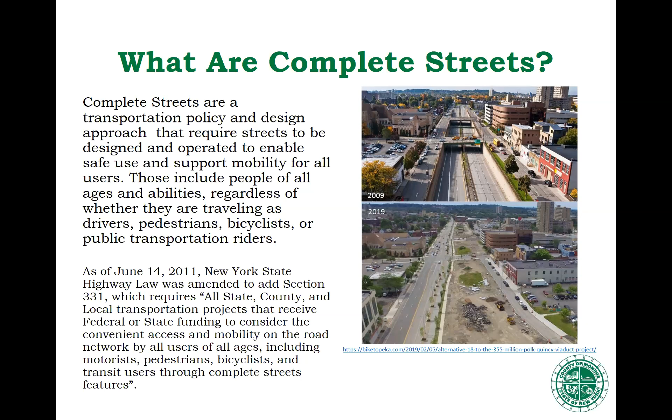So what are some benefits of a complete street? Complete streets create more vibrant and accessible communities. They could attract new businesses because they might have more people coming if they can get there on a bike, on a bus, or if they can walk there. That could also increase the tax base over time. It could also raise property values if you attract more people to the neighborhood or city. It can reduce greenhouse gases and traffic congestion, and improve public health by encouraging walking and bicycling.

What are some elements of a complete street? Sidewalks, bicycle facilities, which we'll get more into on future slides. Bus lanes, transit stops, RTS stops, crosswalks, whether at a traffic signal, a mid-block crosswalk, or a stop-controlled intersection. Median islands, accessible pedestrian signals, which we'll have a picture of later. Curb extensions, signs and striping, and streetscape and amenities.

With complete streets, there's quite a bit of difference between what we typically do on a county road, which we're responsible for, versus a city street. The Monroe County Department of Transportation, which our policy applies to, is responsible for maintaining county roads outside the city, but we also act as the city's traffic engineer. So although we're not directly responsible for designing city streets, we have a large influence on decisions at the City of Rochester Bureau of Architecture and Engineering.

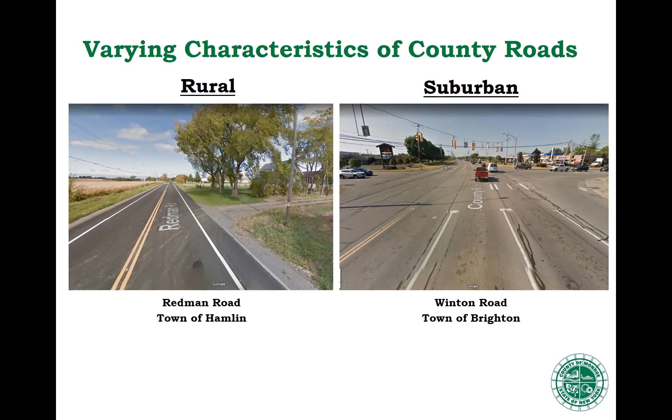I'm going to pass it off to Jim now, and he'll get into more specifics of our highway design and complete streets policy that we put together.

One thing we find with roads in general is that very few projects allow us to widen or narrow the pavement—we're usually using what we have, shoulder to shoulder. Some projects do come up that can add or subtract width, and we'll talk about that, but generally we're trying to figure out what we can do with the pavement we actually have right now. So lane and shoulder widths are one of the ways we can change that.

Edge treatments—curb, gutter, swale, ditch—make a difference in the experience of our other users, not in a vehicle. Is there a drop off, or a curb you have to steer away from because of catch basins? Does a swale or ditch go off, or is it level with a nice transition? We have to consider edge treatments in all this.

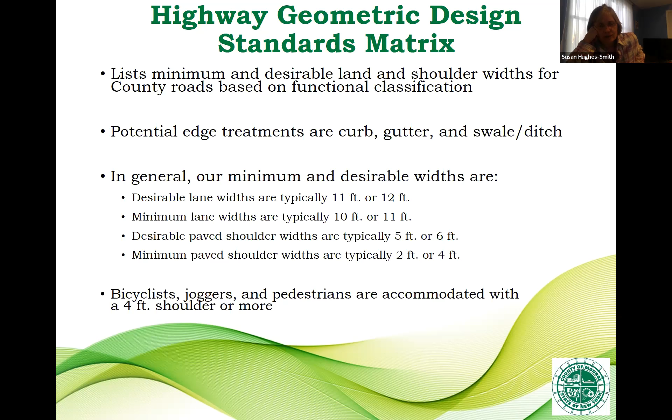But if you had 10-foot lanes and did a bike lane on one side of the road at 4 feet, maybe it would get more use. I'm just suggesting there may be other ways of approaching these problems that we haven't fully considered. You would need a minimum of 5 feet to make a bike lane, and we don't have that much width there, even in one direction.

I agree, I've ridden Elmwood Avenue myself. I bike a lot, I've been out there — very uncomfortable. You just have to take the right lane, keep a real close eye in your mirror, and have some good lights on. But that's the only strategy you really have available on a road like that. We have a lot of parallel roads that are much better, like Westfall, but that one's a very difficult place.

Jim, can I put a fine point on Sue's point previously? What she's really trying to get at is that the design of roads influences how motorists and bicyclists use them. That's what I think she's trying to point out to everyone — not that she doesn't understand you guys get this, but she's trying to make this point for the entire board.

Great, Matt here. Okay, if I get into — I'm sorry, but there are some more slides coming talking about what treatment goes to a particular kind of road. That may help to get there.

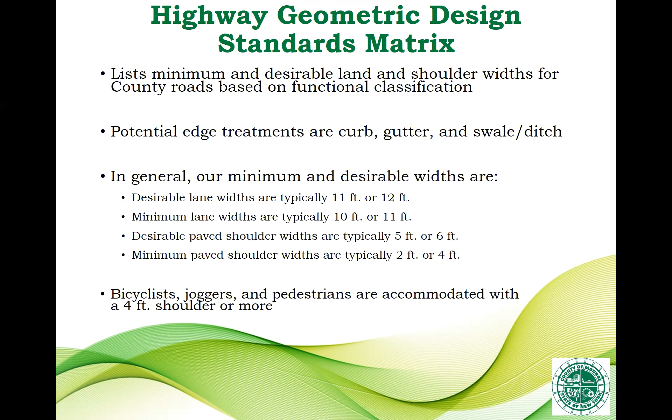Okay, I can hold off until you finish.

Thanks. Okay, let's talk about road diets for a minute. This is an ideal thing for everybody as long as the road can operate at lower capacity. This is a win-win if we could do this, and we have done this a lot.

If Elmwood had lower volume on it, we would go in this direction too, but Elmwood does not have the kind of volume that this could work with. I've been asked that many times. There's a difference in the volume, and also how closely the traffic signals are spaced. The more traffic signals you have, the harder it is to get traffic through in just one lane. An open road in the countryside with one lane can carry more than a city street with a bunch of lights all in a row. So we just have to balance all that out.

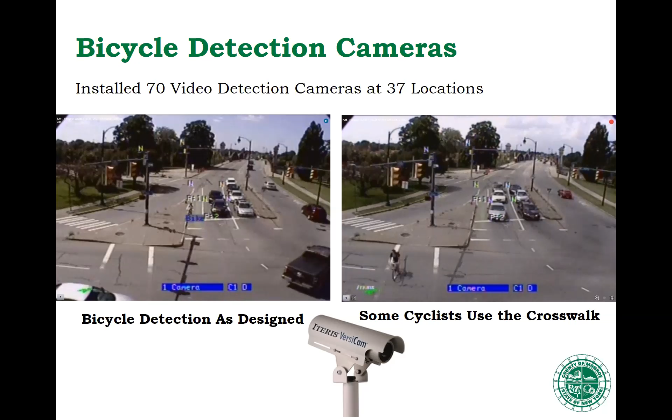There are very few cities in the United States that go that far. Many of them ask you to push the button, or some, I've seen a mark on the road, put your bike here and you'll be detected. Now, others are doing this too, but video detection is the best way to pick up bicycles, motorcycles as well. This also helps them, even though we don't talk about them much as an alternate user. This takes out that need to have a lot of metal on your bike, so if you have a carbon bike, you don't have to worry about it.

It also vibrates when it's time for the traffic light to turn walk. So if you're blind, you keep your hand around that button. It will vibrate off and it's time to go. So that's one of your cues. It's nice and somewhat quiet so they can hear traffic conflicting because they also have to listen for that.

But it does make noise and it speaks. The voice recordings are custom to each street. It tells you which street. So right now the walk is on to cross East Avenue. And then it will also let you know when the walk is off. So it's custom, and it tells you to wait when you push the button. So there's all these messages going out with these smart buttons here.

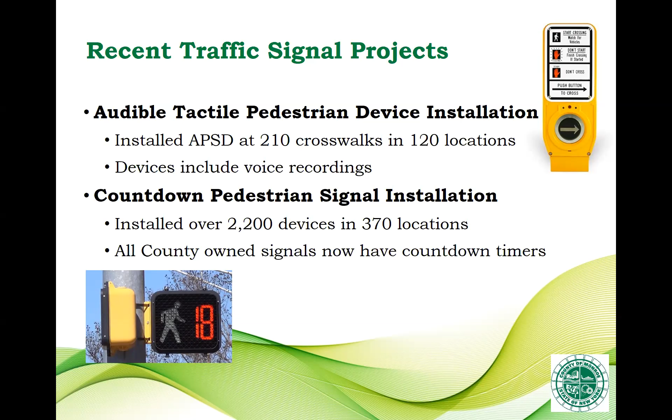A project that's just getting going now, we will not be doing any work in 2020 as it turns out, it's 2021. But we are already, bids have been opened, we're awarding, so we're getting ready to roll, is this thing called the Pedestrian Safety Action Plan. It's state money, actually federal aid money coming to us.

We are going to put all kinds of enhancements at crosswalks all throughout the county. This is the county project. There's a city counterpart to it. And we're putting a lot of these rectangular rapid flashing beacons out.

This device is a push button that flashes what almost looks like a police strobe light going off. It blinks left, right, and calls attention to the motorists that there's somebody there, that they're looking to cross the street. It's not on when they're not there, so I like that effectiveness as opposed to something that flashes all the time. We have 10 of these going out, I believe is the right number. The city has even more.

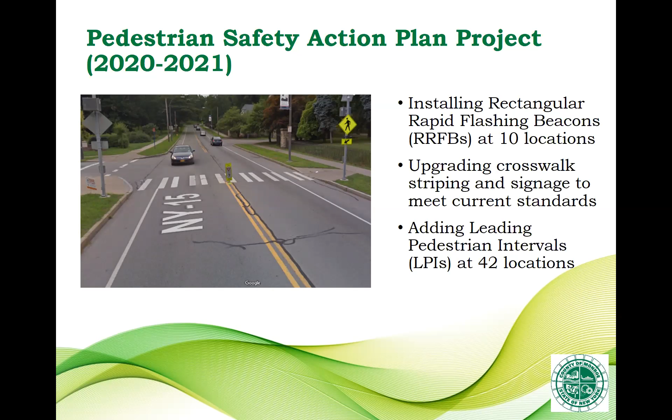This is just letting you know, we're going to transition into the actual complete streets policy where hopefully some of your questions can be answered. Again, I'm more than willing to stop in the middle. That's fine, that's no problem at all.

Yeah, could I just ask a question on the last segment? I thought it was interesting that you said it isn't at every intersection or every time that you give the lead to the pedestrian. But wouldn't it make it safer if it was uniform, so that everyone was always expecting the pedestrian would go first rather than it being haphazard?

The problem is, I'll take downtown as an example, and don't think of the core downtown, but some intersections a little off to the side where pedestrians aren't as common. We do this thing called pre-time, so there's no button, the signal goes to walk whether there's a person there or not. If we did that in an area where pedestrians aren't super common, it's going to do it every time, and you're sitting there at a red light, there's no one going, and you're like, I don't know why this light hasn't turned green.

Oh, the walk light's on, there's nobody here. People get a little frustrated, they might start running the red light. You're losing capacity, you're sitting for what we call no reason. So it's best to do it where there's a button that distinguishes whether a pedestrian is there or not. Now, at a busy downtown intersection like Main, State, and Exchange, it totally makes sense to run it all the time, and I will be doing that.

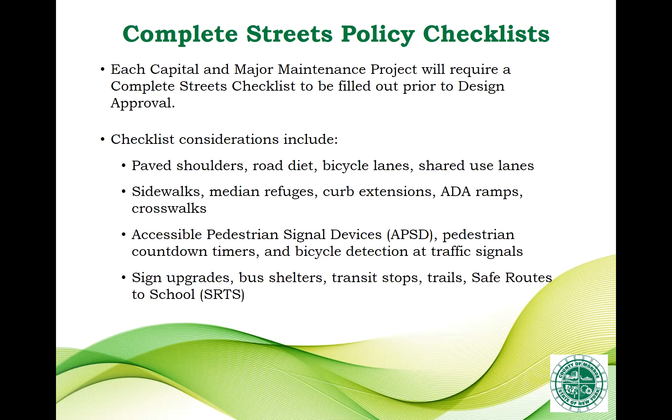We don't do private driveways or developments. We don't do state, town, or village projects. Somebody asked about state roads, the policy only applies to county roads and city streets.

There are some factors on there: scarcity of population, travel, not really attractors meaning destinations for people, problems with environmental or social impacts. Environmental impact being like widening a road going into wetlands, for example, or problems with cost, safety, or timing implications. There are some exceptions, but that doesn't mean we don't look at the checklist. As we go through, we take these things into consideration, so we don't literally have a blank piece of paper like it might seem. There are some constraints to consider, but in general we're trying to look for every opportunity we can.

To make this a reality, we work with the county and town governments, and believe it or not, occasionally with state DOT, but most of the time not. If it's across two roads crossing each other, we will work with them.

Many of the towns have long-term transportation plans, and the county's getting ready to do one of its own. I'm talking about active transportation plans. The county is preparing to do one of its own.

Tying all these together, we make a great effort to learn about, read about, process through, and make a decision on each and every recommendation in their corridor studies and town-wide studies to see how that applies to this county road. Can we fulfill their desire, or is there a particular reason we cannot? In a few cases, we don't agree with what they wrote. There have been times when the consultant got a little ambitious and started to apply things uniformly in places where we don't think that's the appropriate device. But we look through it, discuss it with the town, get their input, and work together. It will take time to see the results countywide because the projects occur one at a time, so we have different complete street results depending on the character of the road.

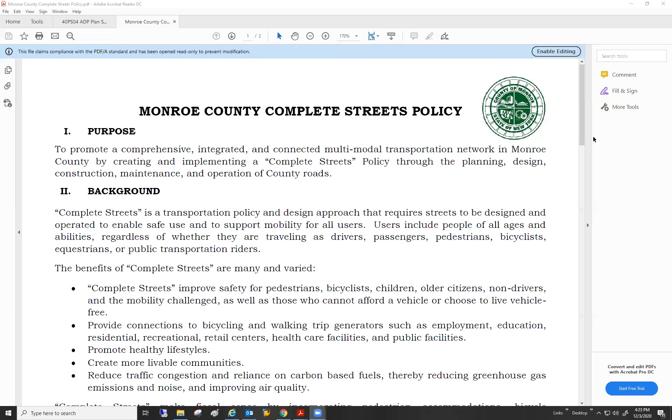Let me see what I've got here. That's the thank you—did we have the actual policy? I think we sent the PDFs out, I don't know if everybody received it. We sent the policy and the checklist. We're going to bring that up, pull it up. We did receive them, thanks. Sorry about that, we're going to go ahead and bring that up, it may answer some of the questions you all had. There was also the highway lane with... okay, we'll get back in here in just a second. I'm sorry, yeah I see it. Sure, okay, there we go.

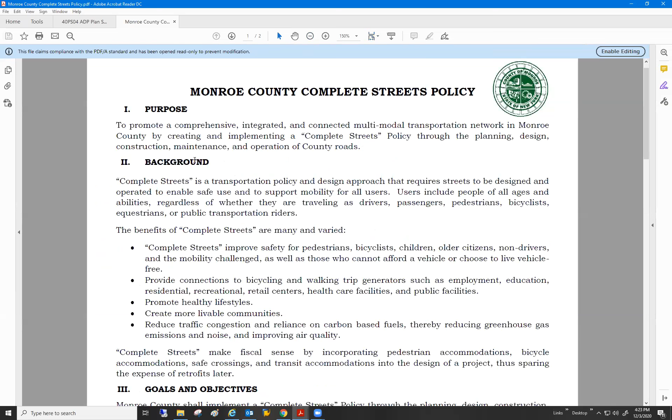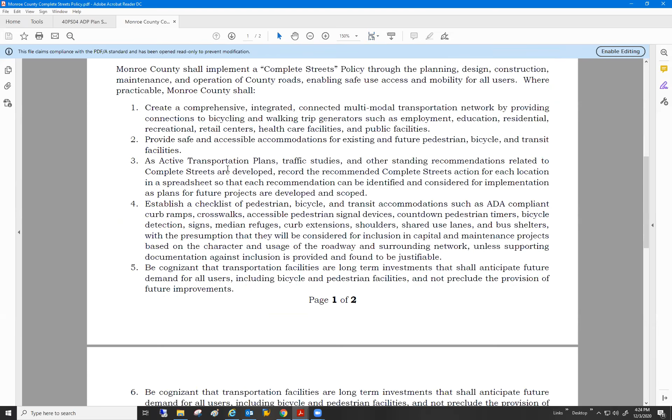So this is the policy itself. As Jim mentioned, there are four sections: the purpose, which is kind of what we talked about in our presentation, as well as the background—what are complete streets, why are they beneficial—some of our goals and objectives. I won't read through all these right now, but a lot of it ties into what our presentation was about, the advantages and reasons for complete streets. Then there's a section at the end about the exceptions, like Jim was talking about.

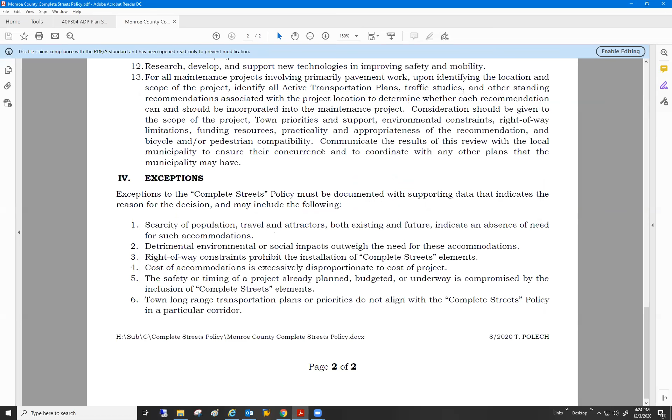Do you have the highway geometrics document? Let me just pull up the checklist first. Yeah, okay, sorry, we're walking you through this. Oh, this is good, yes. This will get you the specific things we're looking for.

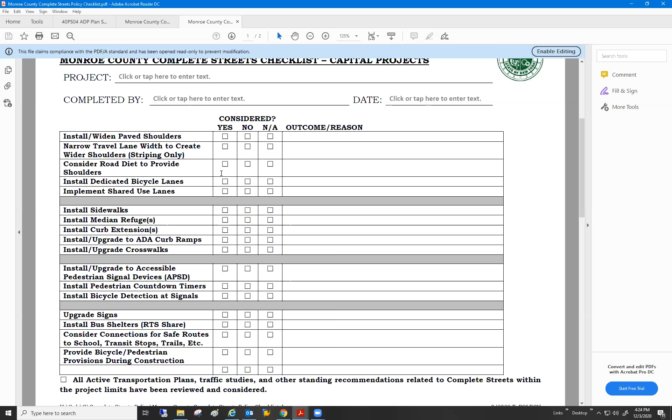So this is a checklist that we would fill out. There are two separate checklists: one for capital projects, which are typically more complex—you might be replacing the road, milling it out, replacing curbs, putting in gutters, etc. This one has a more robust checklist: install or widen paved shoulders, narrow travel lanes, consider a road diet, etc. There's a more basic one for maintenance projects, where we're typically not doing that complex work—just paving over what's there or doing a small mill and overlay. So there's not as much opportunity for these projects. A lot of it would just be about striping with the same width of road. As Jim mentioned, we're not really changing the width of a road on maintenance projects unless we're adding a couple feet to the shoulder.

I do want to note the box at the bottom is important: all active transportation plans, traffic studies, and other standing recommendations related to complete streets within the project limits have been reviewed and considered. So we pick up on other people's work. A traffic study could be a development going in that's going to attract more walking or biking, so whatever standing recommendations are out there, we do our best to put them into the project. I think that's very important. That's been running for three or four years at least, maybe longer. We keep a very robust database on what recommendations are proposed for any particular location. We track them, and as they get completed or implemented, we track that as well.

Do you want me to pull up the geometric? Yeah, the geometric highway would be helpful. That's the other one, I'm sorry folks, we've got one more here. Give us one minute.

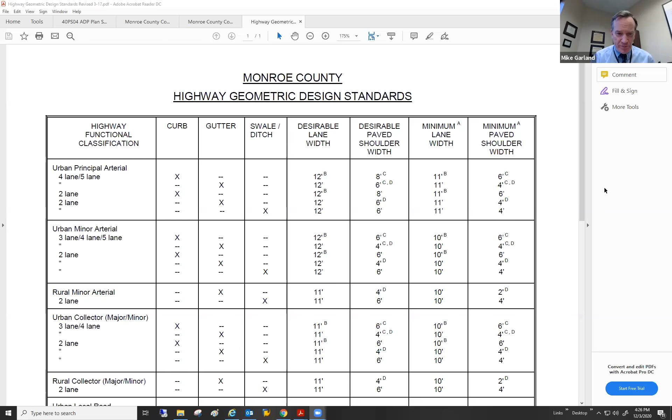Maybe while you guys are doing that, I can jump in and make some commentary. We appreciate your unbridled enthusiasm for complete streets—it's very helpful and informative, and I always learn something when you make the presentation. So as you guys know, keep this in mind: our group is after reducing greenhouse gas and gas emissions, reducing the county's carbon footprint, and really getting your motorists to switch to electric vehicles or ride their bike.

I'm kidding. No, we're a little serious.

One thing that might be worth this group exploring: safety is super important, but the charge of this group is looking at climate action, greenhouse gas reductions, and carbon footprint reductions. So how can a complete streets policy work towards that end? Any thoughts from the committee or Jim and Tom on that?

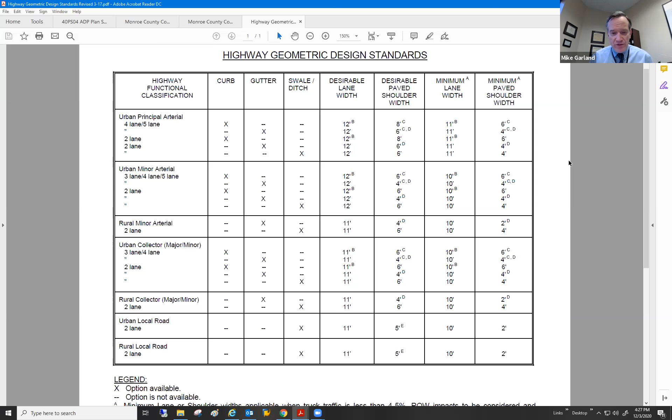Okay, Mike, one last thing to share. I was going to put this on the presentation but it was too small to read, so I have an external document up now. This is about lane widths, the guidelines for any situation and what is recommended for lane widths to be safe. As you can see, the conclusion could be anywhere from 12 down to 10 feet, depending on the context. Many guidelines do allow 10-foot lanes, but there's a minimum and a desirable width.

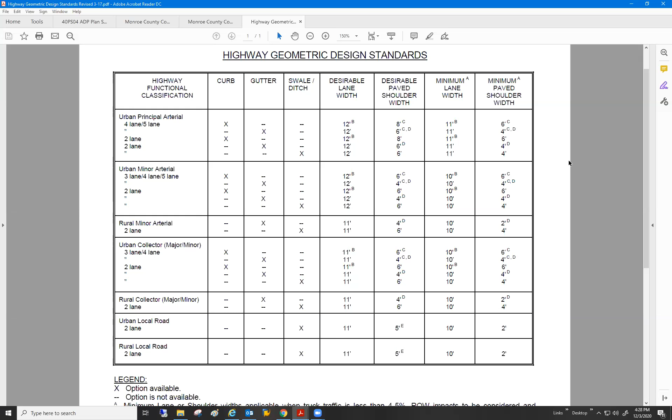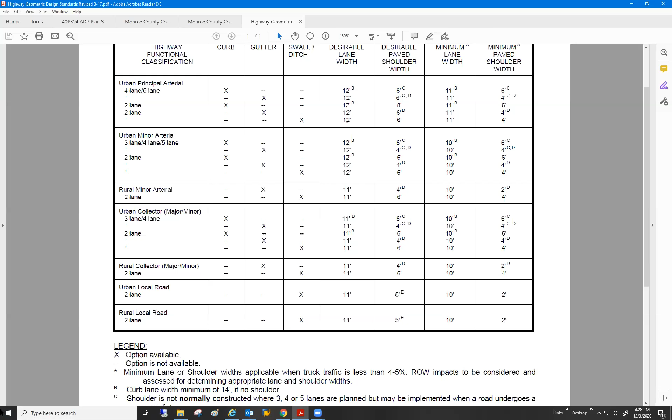The difference between minimum and desirable may lead this committee to say, well, go with the minimum every time. We look at that, but keep in mind the minimum applies when truck traffic is just barely under the threshold - you have to read the footnote there. When truck traffic is less than 4 to 5%, that's when the minimum lane width comes into play. And if you have a curb lane width with no shoulder, there's a 14-foot minimum. So there's a bit more caveat as to whether you go to 10-foot or 11-foot lanes.

If we fit the 10-foot criteria, then we will, and it makes sense to do that. So we are trying to make the lanes as narrow as practical. I hope that helps.

Please, Mike, I jumped on your question, sorry. Well, that's okay, I understand the details are important, and I think I'll never look at a road the same again now that I know some of the geometrics you guys look at with lane widths and curbs. So it makes good sense, and I think it's informative for the group, just out of interest.

So your question is, how does this policy apply to make a more sustainable environment? In other words, how can we roll this into our climate action plan and use it as a tool?

Okay, well, a couple things. One is that the implementation of active transportation plans around the county - towns, villages, the city have them - is aimed specifically at trying to get as much safe and encouraged travel on other modes as possible. That is their goal. By implementing them, we are encouraging and accommodating other users in the manner most appropriate for serving them, without compromising everything else we try to do here.

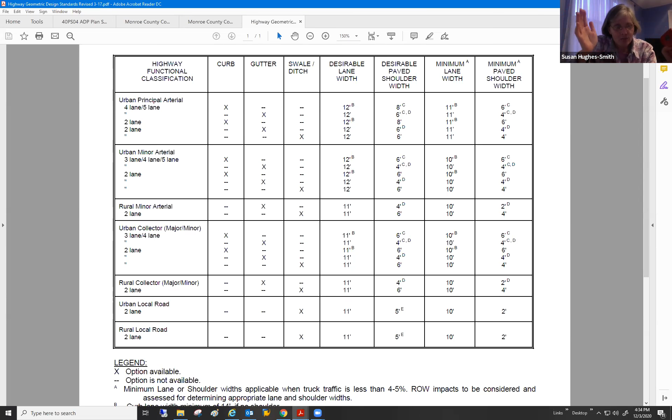Thank you. I just really, really appreciate your presentation and your enthusiasm for your work and the complexity of it. This is in no way meant to direct it at the staff at all, but when those of us who do something regularly, we get used to it, right? So if we want to encourage people who are currently not bikers, not walkers, you have to look at it from their eyes. Part of their discomfort is that it is really intimidating. I would no more drive in the middle of the right lane on Elmwood Avenue than I would walk barefoot down the middle of it. That would be insane to me. And I do more biking than most people.

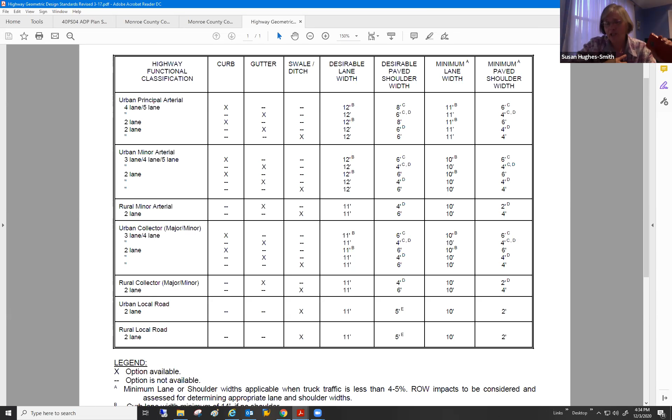But, so we... We lost her. Did we lose Sue? I think we did. Yeah.

I don't hear anymore, but I really appreciate the presentation this afternoon. I think the vast majority of the public takes roadways for granted, but being a classically trained engineer, I never will and never have. I just find the science of roadway engineering design, paving, striping, and traffic management absolutely fascinating.

So, Chairman, can I add one point to all of this? Greenhouse gas emissions are 28% transportation by sector in the United States in 2018, and of that 28%, 60% is cars, light duty vehicles. So that's really what we're looking at when we talk about these things, trying to figure out a way to get some of that 60% down to a greater share of cyclists and pedestrians. That's how I see this coming into play with this committee.

And to the extent that we can encourage bicycling and walking, so much the better, right? And by the way, Pat, I've seen you commute on the bike a number of times, I know you're doing it too. Good for you. I am, but I would agree with Sue, there are definitely some areas of improvement for people who are less experienced than you and I.

Oh yeah, and I would not send them down Elmwood Avenue either, that would not be my choice. But it's funny because Westfall Road parallels Elmwood, a couple blocks or a little distance away. It's a far better experience on Westfall Road, and you get to the same places you do on Elmwood.